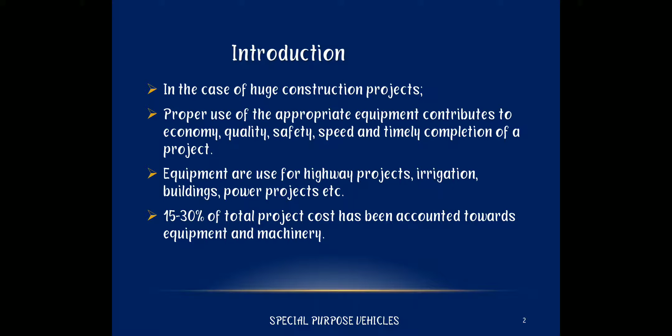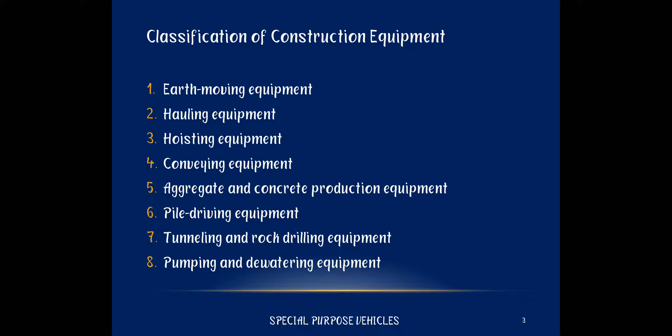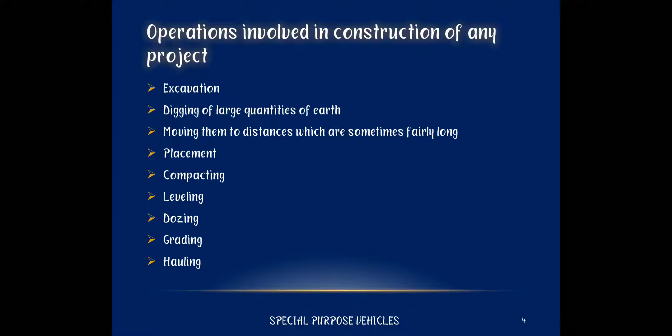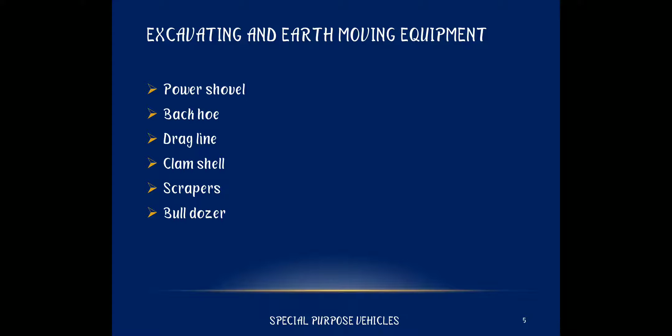Excavating and earth moving equipments include power shovel, backhoe, dragline, clamshell, scraper, and bulldozer. These equipments are called earth moving equipments or excavating equipments.

First is the power shovel. The power shovel is used to excavate the earth and to load the hauling unit or truck. It is capable of excavating all types of earth except hard rock; hard rock cannot be excavated by the power shovel.

The size of the power shovel is known from the size of the bucket, and it varies from 0.375 meter cube to 5 meter cube.

Basic parts of the power shovel include the track system, cabin, cable, rack, stick, boom, foot pin, saddle block, boom point, sheaves, and the bucket.

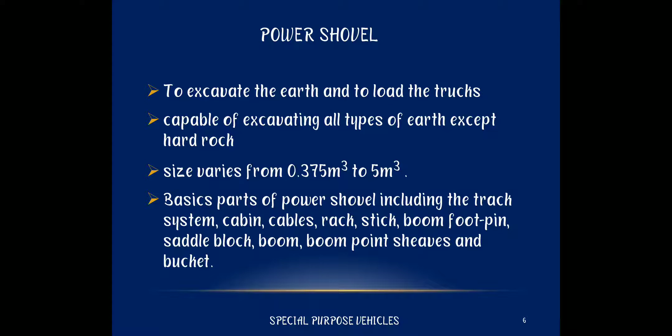The application of the power shovel is suitable for close range of work, where transportation distance is less, as it is more suitable there. It is capable of digging very hard materials like stone, etc.

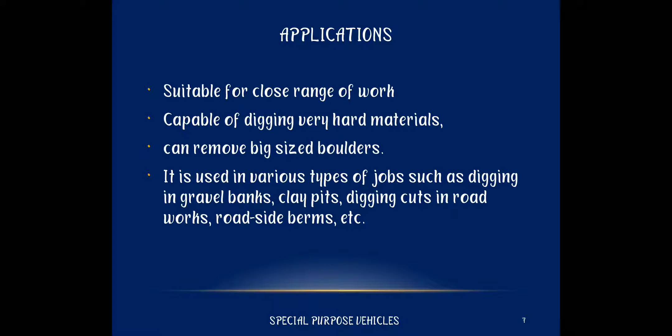It can remove big size boulders, loose stones. It is used for various types of jobs such as digging in gravel banks, clay pits, digging cuts in roadworks, and roadside berms.

Now we will see the factors which affect the output of the power shovel: class of material, depth of cut, angle of swing, job condition, management condition, size of hauling unit, skill of the operator, and physical condition of the shovel.

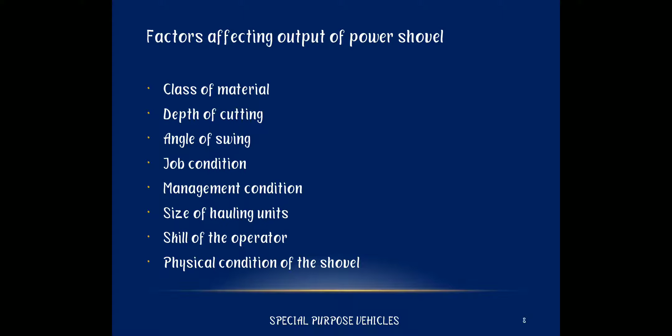So there are four types of operation: first is digging, then lifting, then dumping, and the next one is returning to stroke. These are the four main operations in the operation cycle of the power shovel.

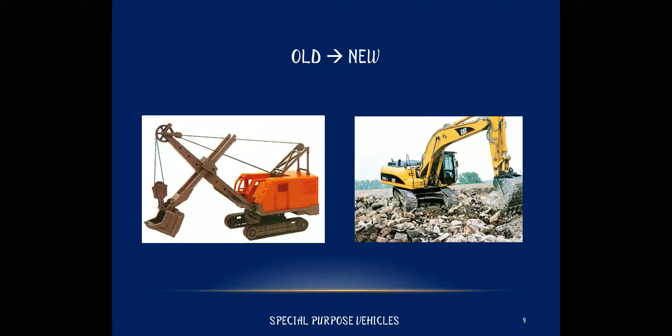Next we will see the backhoe. In the backhoe, the bucket is given at the back side of the shovel. It is also known as back shovel or pull shovel. It is used to excavate below the natural surface on which it rests.

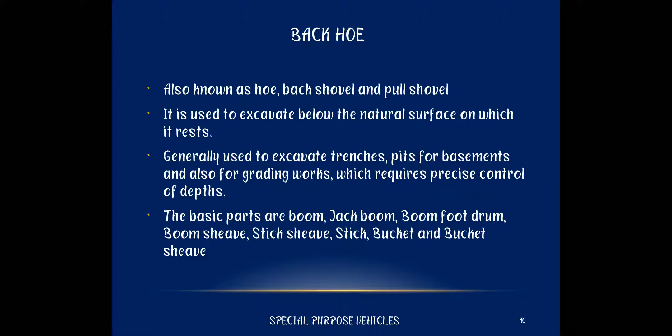Below the surface wherever the soil is raised, at that point below we can dig the material. It is generally used to excavate trenches, pits for basements, and also for grading works which require precise control of depth. The basic parts are boom, jack boom, boom foot drums, boom sheaves, stick sheaves, stick, bucket, and bucket sheaves.

As I said, the bucket is placed behind the driver cab, so it is called a backhoe shovel.

Okay, so this is the main parts of the backhoe excavator. This is the hydraulic circuit, meaning cylinder for the operation. This is the bucket, this is called the boom. This is the stabilizer leg. This is the cabin, and this is the front bucket or the loader.

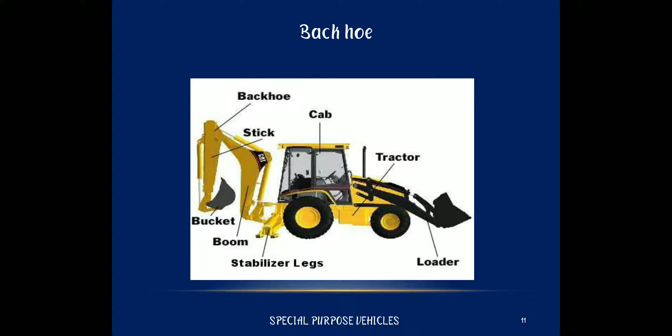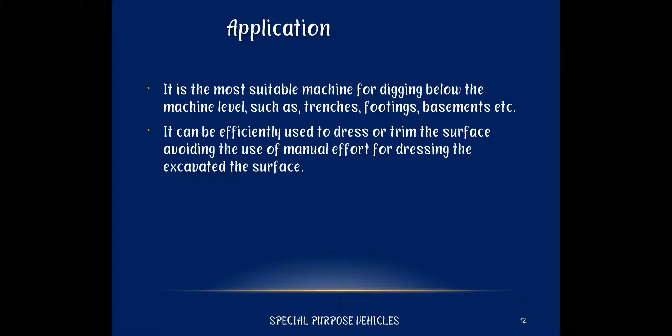The application of the backhoe excavator is that it is the most suitable machine for digging below the machine level, such as trenches, footing, and basement. It can be efficiently used to dress or trim the surface, avoiding the use of manual effort for dressing the excavated surface.

Now we will see why the dragline is so named, because of its prominent operation of dragging the bucket against the material to be dug. Unlike the shovel, it has a long light crane boom, and the bucket is loosely attached to the boom through the cables. Because of this construction, a dragline can dig and dump over a larger distance than a shovel can do.

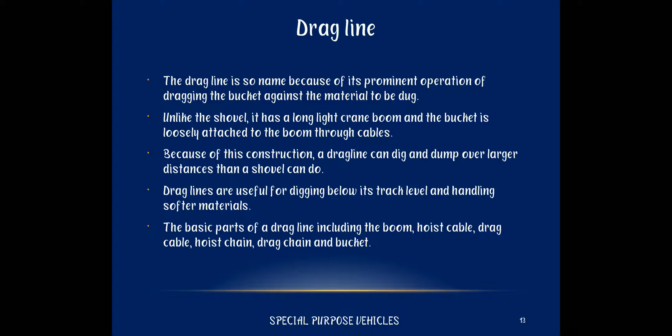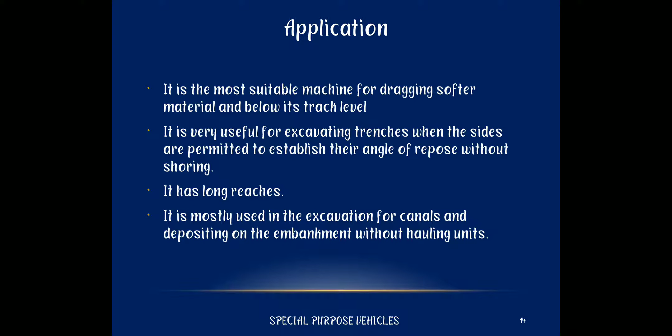Next is the application of the dragline. It is the most suitable machine for dragging softer material below its track level. It is useful for excavating trenches when the sides permit establishing their angle of repose without shoring. It has long reaches. It is mostly used in excavation for canals and depositing embankment without a hauling unit.

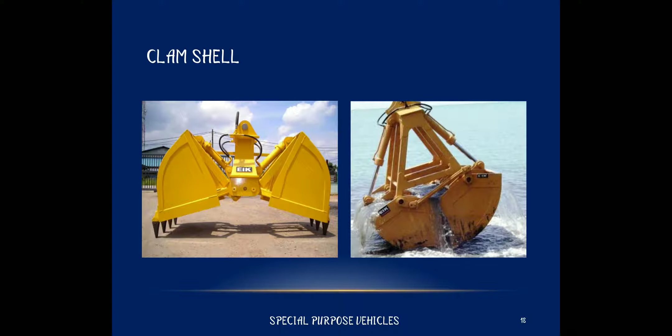Next we will see the clamshell. So the clamshell is one type of bucket, which is closed from both sides. This is the clamshell bucket, which is mounted on the shovel or the backhoe. It gets this name due to the resemblance of the bucket to a clam, which is like a shellfish, with a hinged double shell.

The front end is essentially a crane boom with the specially designed bucket loosely attached at the end to the cable, as in the dragline or the shovel. The capacity of the clamshell bucket is usually given in cubic meters based on the size of the bucket.

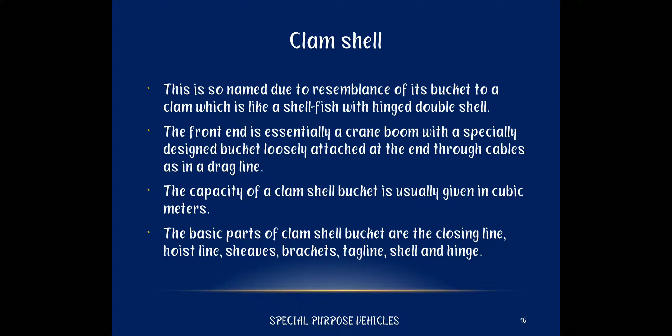The basic parts of the clamshell bucket are the closing line, hoisting line, sheaves, brackets, tag line, the shell and the hinges. The application of the clamshell is used for handling loose material such as crushed stone, sand, gravel, coal, etc. Its main feature is vertical lifting of material from one location to another, mainly used for removing material from cofferdams, sewers, manholes, well foundations, etc.

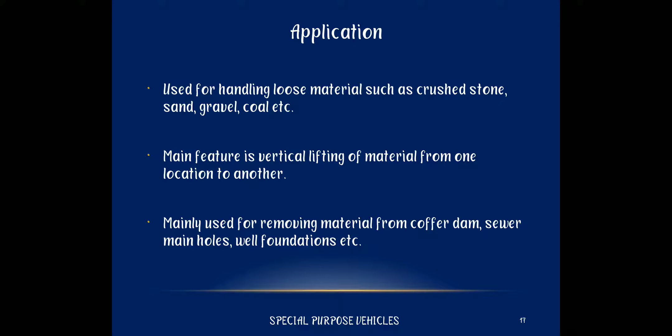So comparison between the different types of equipment. We can see the power shovel, backhoe, dragline and the clamshell. We will see the parameters and how they are capable of performing work. First parameter is excavation in hard soil or rock.

The power shovel is good for it, the backhoe is also good, the dragline is not good because it is mostly used for looser material, and the clamshell is also poor. For excavating in wet soil or mud, the power shovel is poor, the backhoe is also poor, while the dragline is moderately good and the clamshell is also moderately good.

Next parameter is the distance between the footing and the digging point. The power shovel covers a small area, the backhoe also covers a small area, the dragline covers a longer area, and the clamshell also covers a longer area. So this refers to the distance between where the machine stands and the digging point.

Next is loading efficiency. The loading efficiency of the power shovel is very good, the backhoe is good, the dragline is moderately good, and the clamshell is precise but slow. This is because the clamshell has a closed bucket, so we get the proper amount of material, but it is slow in operation.

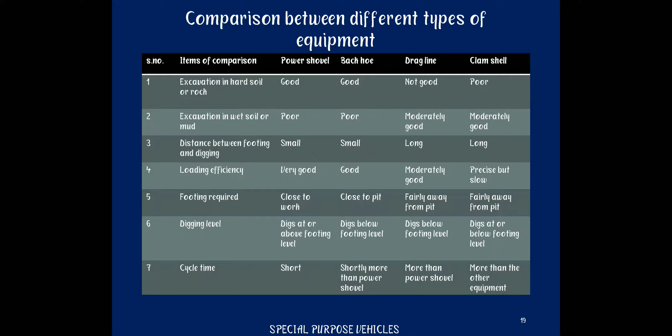The cycle time for the backhoe is slightly more than the power shovel. For the drag line, the cycle time is more than the power shovel. And in the clamshell, the cycle time is more than the other equipments like power shovel and the backhoe.

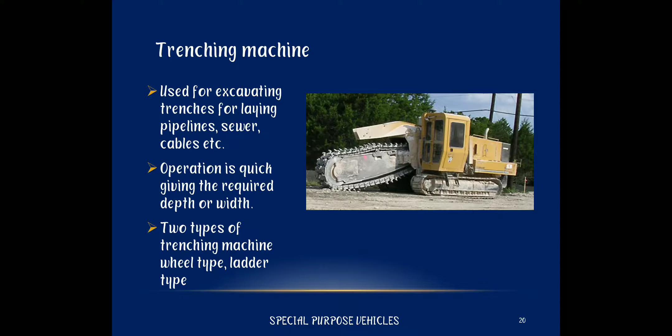Next, the trenching machine is used for excavating trenches for laying pipelines, sewer and cables, etc. The operation is quick, giving the required depth and width. There are two types of trenching machines: wheel type and ladder type, or crawler type. This is the crawler type trenching machine.

Now we will see the scraper. It is the unique machine for digging and long distance hauling of plowable material. It is a self-operating machine, not dependent upon other equipment. Wheels of the machine cause some compaction, meaning whatever smoothing or loosening of material is done by other equipment gets compacted again due to that wheel.

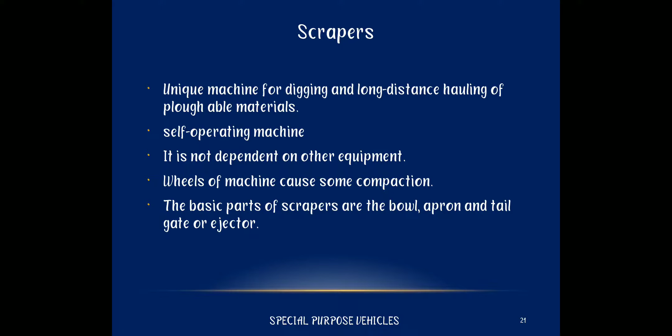The basic parts of the scraper are the bowl, apron, tail gate or ejector. These are the basic parts of the scraper. This is the apron, here is the bowl, and behind that the ejector is given.

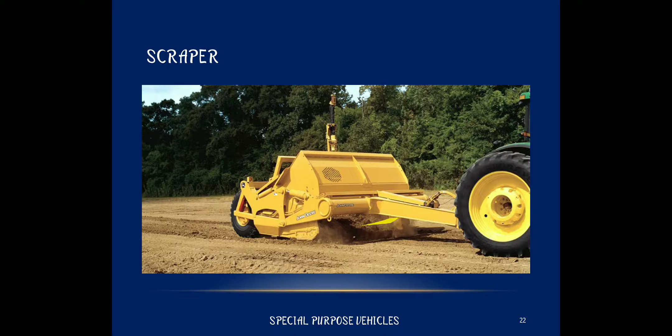Now the bulldozer. There are two types of bulldozer: the cable type bulldozer and the hydraulic bulldozer. The heavy blade attached to the tractor pushes the material from one place to another. The tractor can be of crawler type or wheel type, meaning it is mounted on the crawler or mounted on wheels.

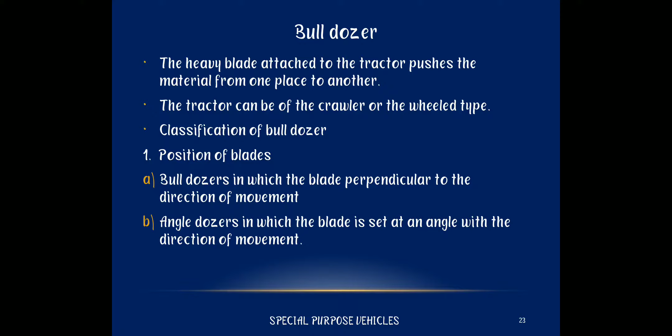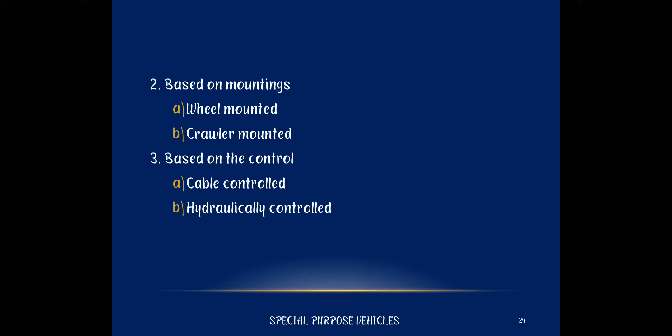The classification of bulldozer is based on the positioning of the blade. A bulldozer is one in which the blade is perpendicular to the direction of movement. An angle dozer is one in which the blade is set at an angle to the direction of movement. It is also classified based on mounting, wheel mounted or crawler mounted, and based on control, cable controlled or hydraulically controlled.

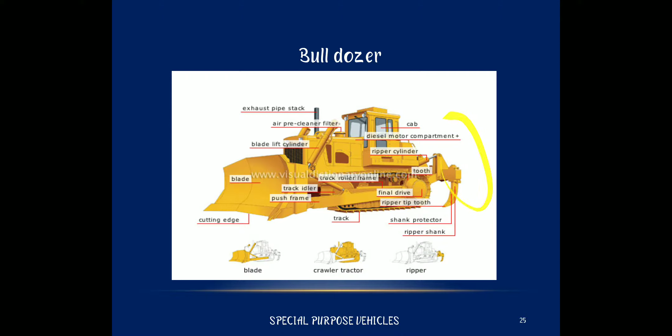Applications of bulldozer are mainly for the following operations: spreading earth fill, opening pilot roads to mountains and rocky terrains, clearing construction sites, maintaining haul roads, clearing lands from trees and stumps, and backfilling trenches at construction sites by dragging earth from one place to another.

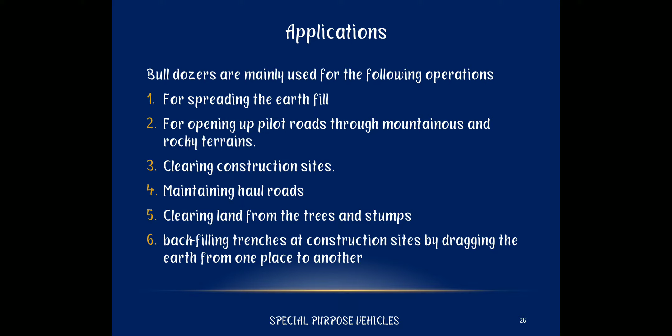Now we will see the tractor, the multi-purpose machine used mainly for pulling and pushing other equipment. Tractors are classified into two main types: crawler type tractor and wheel type tractor.

Crawler type tractor is used to move the bulldozer and scraper. The crawler has a chain by which this tractor can be very effective even in the case of loose or muddy soil. The speed of this type does not normally exceed 12 km per hour.

In the wheel type tractor, the engine is mounted on four wheels. The main advantage is higher speed, sometimes exceeding 50 km per hour. It is used for long distance hauling and on good roads.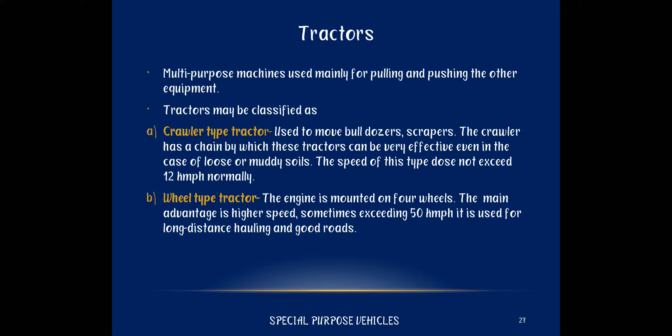This is the tractor which is crawler type, which is mounted on the crawler or chain.

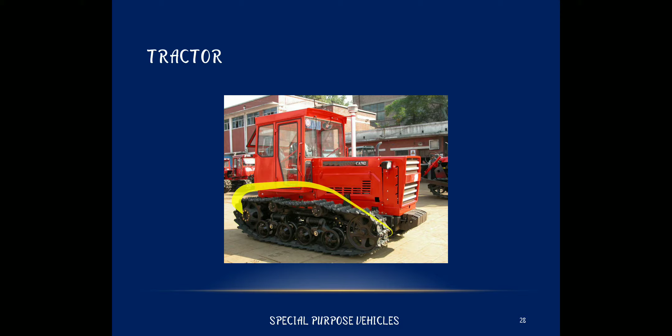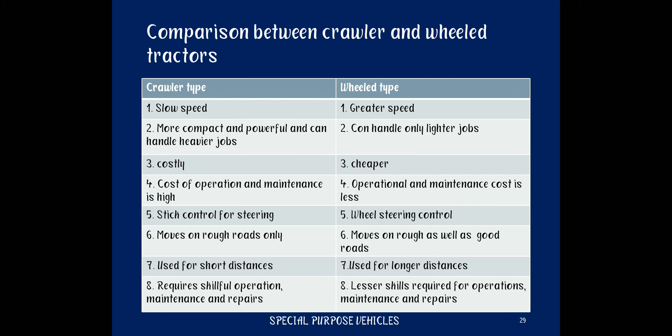The crawler type tractor has stick control for steering, while the wheel type is controlled by wheel steering. The crawler type moves on rough roads only, while the wheel type moves on rough as well as good roads. The crawler type is used for shorter distances, while the wheel type is used for longer distances. The crawler type requires skilled operation, maintenance and repair, while the wheel type requires lesser skill for operation, maintenance and repair. This is the comparison between the crawler and wheel tractors.